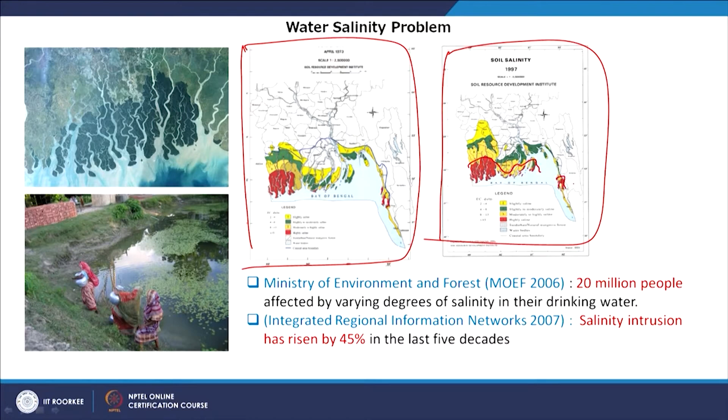As I said, during the late 1970s or in the beginning of 1980s, the Bangladesh government, supported by the United Nations Children's Fund, UNICEF, initiated a mass project installing shallow tube wells, STWs in short, to provide safe drinking water to the rural population suffering from waterborne diseases such as diarrhea and cholera, due to contamination of drinking surface water.

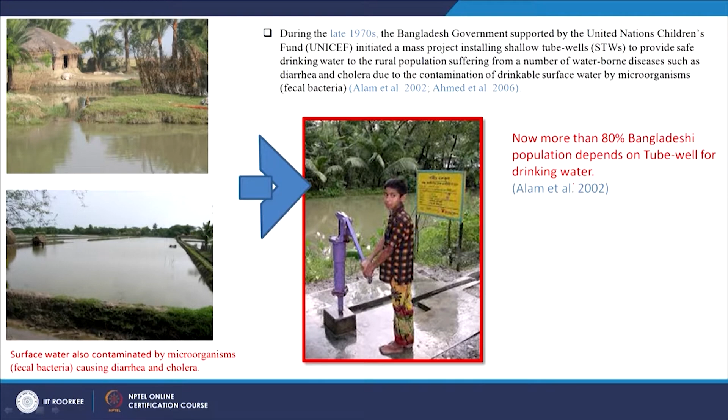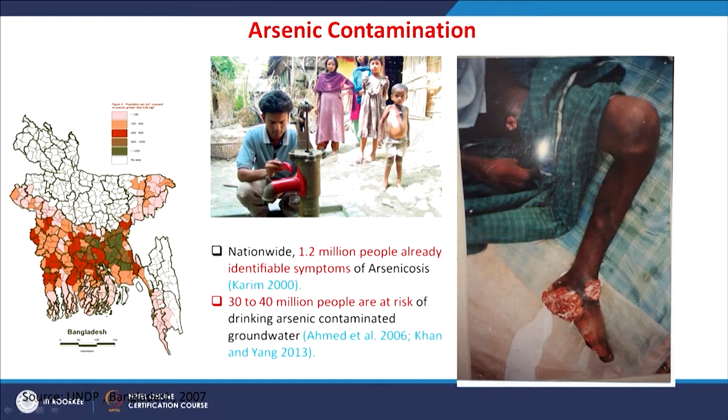Now more than 80% of the Bangladeshi population depends on tube wells for drinking water. Now they are affected by water arsenic contamination. 1.2 million people of Bangladesh already show recognized identifiable symptoms of arsenic, and 30 to 40 million people are at risk, directly or indirectly, because they are drinking arsenic contaminated water. It's not a small number, 30 to 40 million population.

Then what is the solution for this? You can see water, but you cannot drink water. There is a lot of water. They don't have water scarcity as such, because it's a coastal area. You can see water every day, but you cannot drink water, neither surface water nor groundwater.

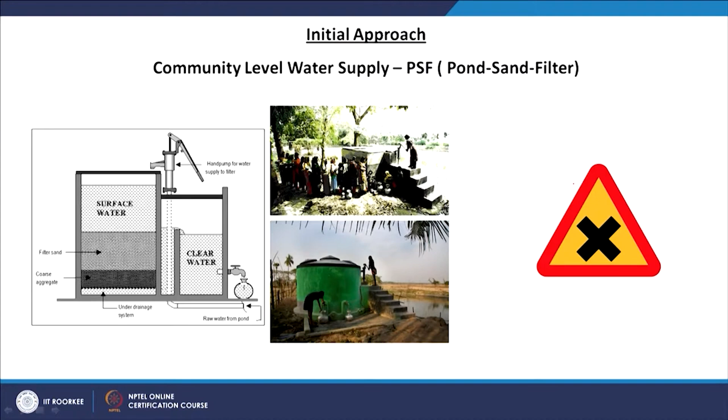What is the situation? Some people came up with the idea of community level water supply, the pond sand filter system. So you collect the pond water, and then with some kind of sand filter system, it's aggregated and comes out as clear water. But there are a lot of maintenance issues, and it's called PSF, pond sand filter. People are finding that this is not really working at all to provide drinking water.

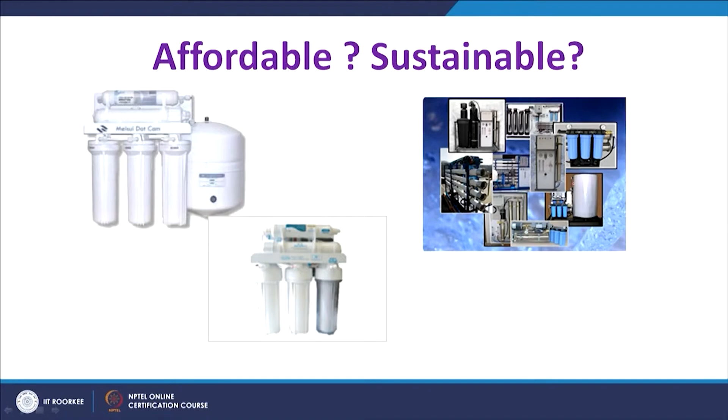There is another solution, providing water filters to the people, which would work to some extent, not badly, to provide better water. Though scientists are not very sure that it can really reduce or eliminate arsenic, still it is not very bad.

But are they affordable? The people in coastal Bangladesh are one of the most poverty-stricken people. They are really, really poor. A large number of the population are very poor. Can they afford to have these filters? This is a question, the big question, right?

So people are saying now that we need alternative drinking water in this area. But scientists find that people are not very encouraged, not very motivated to have these alternative drinking water sources. So people say there are several reasons.

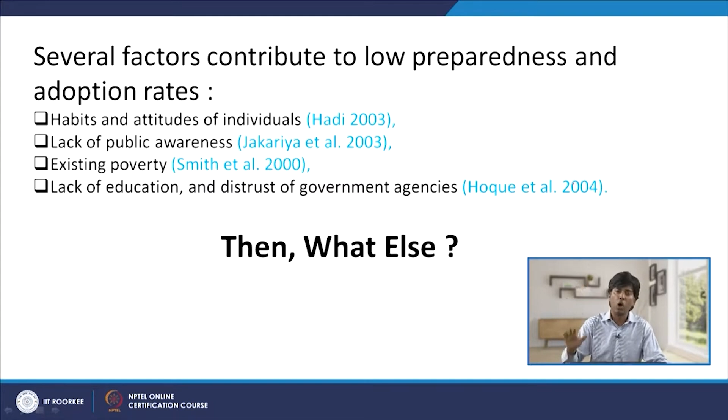People have a habit and attitude kind of problem. They became used to what they are drinking. They would say, no, my father, my forefathers, my grandfathers, they all lived here. They are drinking the same water. They didn't have any problem. They lived 70, 80 years without much issue. Why should I bother? I am used to it, I've become resilient, so don't worry about me.

Well, this is one perspective. Another perspective along similar lines is that people have a lack of awareness. Maybe they don't know, they're used to it, and they don't realize the seriousness, severity, and vulnerability of this disaster.

Another factor is existing poverty. People are really poor, they have so many problems in life, their entire livelihood is at risk. All households are at risk from the poverty perspective, income perspective, economic perspective. When they are in crisis every day because of their financial condition, it's really tough for them to look into other matters. It's a kind of background risk.

Also, there are other factors people identified: lack of education, and distrust in government agencies and NGOs. They cannot believe that these NGOs and governmental organizations are really honest in promoting any kind of alternative drinking water technology, because in the 1980s they were told that their surface water, their ponds, are contaminated, please use tube wells.

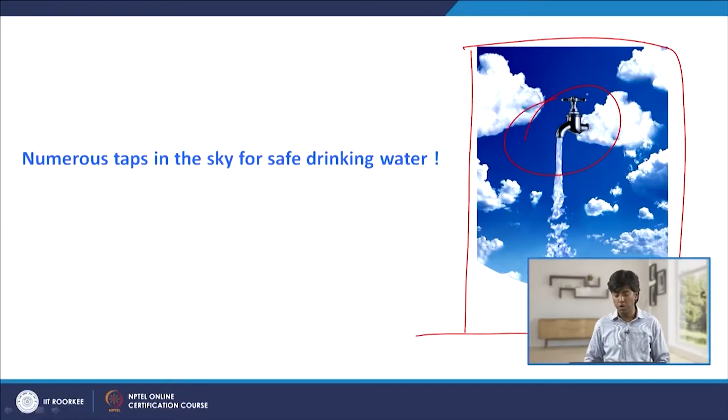Some people came, accepting that challenge, with a very innovative and simple idea. They said, hey, come on, we have plenty of water actually. There are numerous taps in the sky for safe drinking water. The sky will provide us drinking water, don't worry. Like this tap, you get gallons and gallons of water. Who says we don't have water? There is a Japanese non-profit organization, People for Rainwater.

They said, okay, this is called amamizu. In Japanese, it's a kind of rainwater that will bring a smile to every home. Therefore, diffusion of innovation is inevitable.

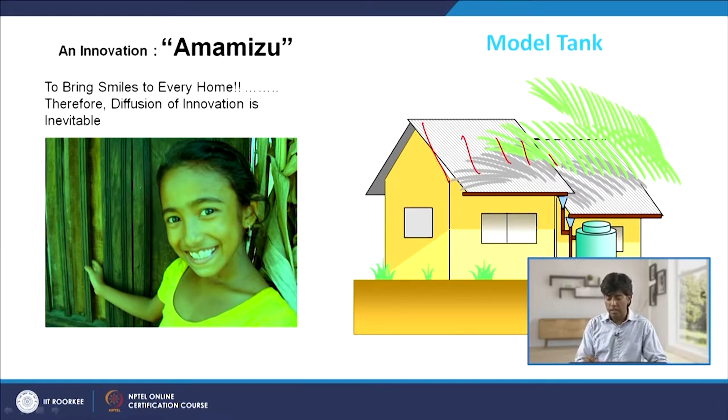This is a model tank at the household level. During the rainy season, you collect water from the roof, it gets channelized, and you store it here. Simple, very simple. There is a small net, pipes, and faucets. This is the small, simple technology you need.

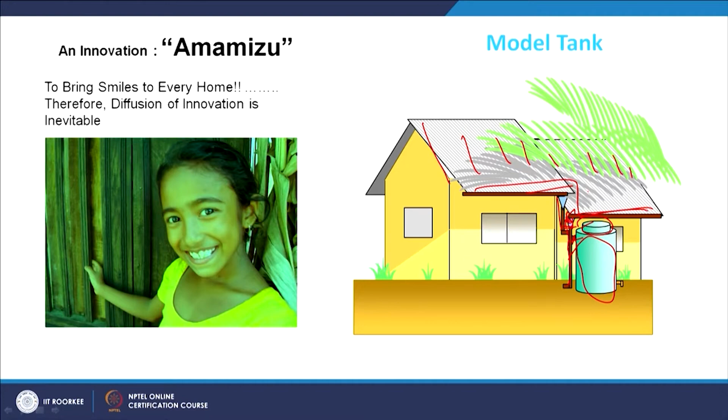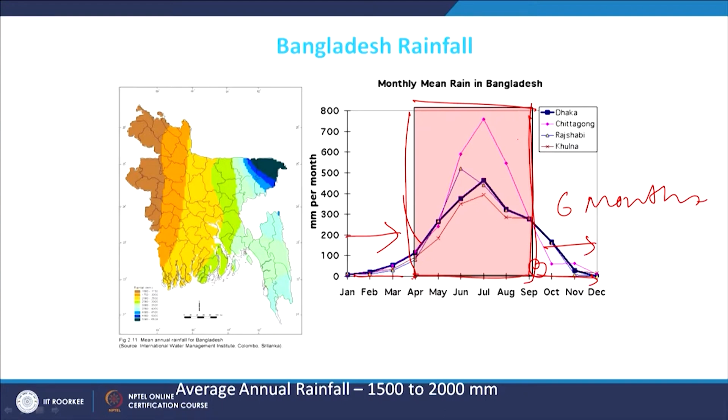Bangladesh has very good rainfall. From April to May you get rainwater, continuing till September. So from October to March, for 6 months, you need stored water. You preserve water during the rainy period and continue using it for these 6 months, so you don't need to worry. They have an average rainfall of 1,500 to 2,000 millimeters, but concentrated only in these months.

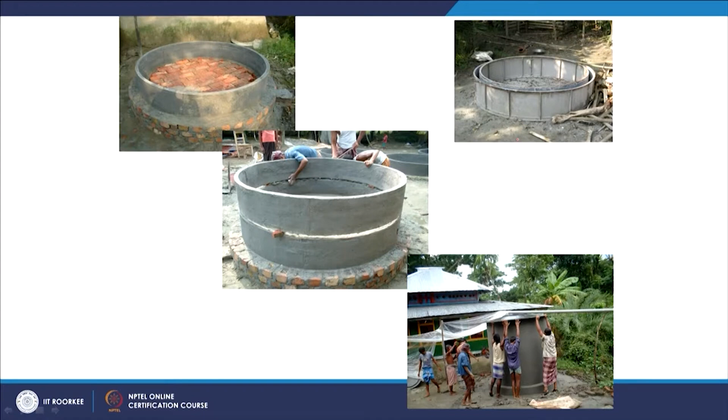Some people came up with the idea that if we have around a 5,000 liter water tank, then a family of 4 or 5 members can easily run 6 months with this preserved water for drinking purposes. So this is a small tank at the household level.

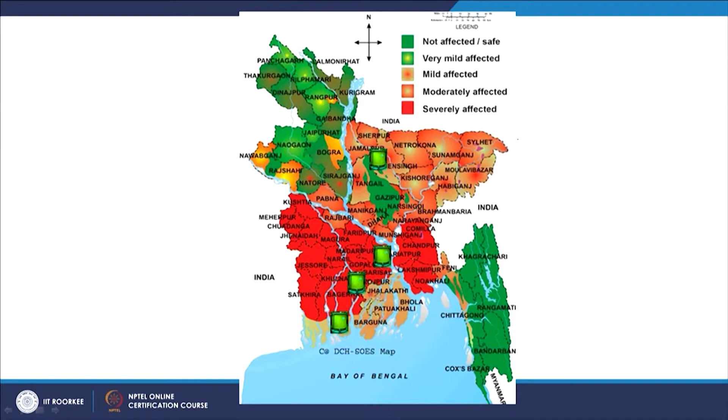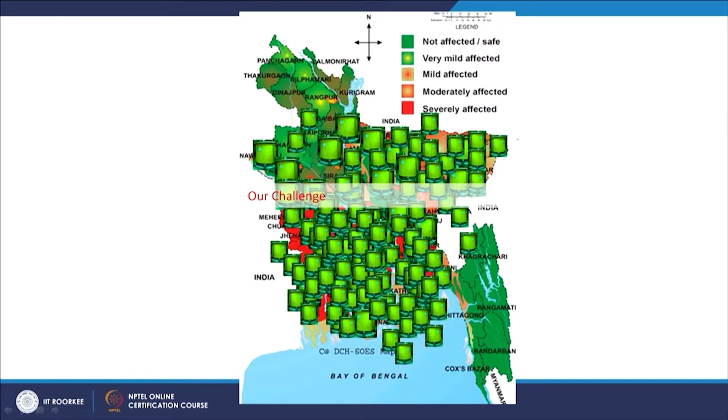So this is our challenge: how can we recover from this? How can we promote this rainwater harvesting? Given that, how can we solve this problem? As planners and practitioners, we are saying you need to promote this tank to reduce drinking water risk in Bangladesh. Tell us, what is the solution?

People are poverty-stricken, people have habit problems, people have problems of risk ignorance, so they don't consider so many problems. One is the socioeconomic problem, another is the educational problem. During such complex situations, the government is hiring you and asking what solution you can give.

So in order to encourage people, you first need to know why, what they need. What is the role of information? What kind of information should we provide to them, and how should we provide it, so that they would be motivated and encouraged to install these tanks?

So this is the ideal: a small effort. We don't need a very gigantic big effort, just a very small one. This small effort can have a very gigantic impact. Diffusion of innovation, this innovative technology, is inevitable for sustainable climate change adaptation and disaster risk management. So putting a lot of small power together adds up to big power, ending at a very gigantic big power.

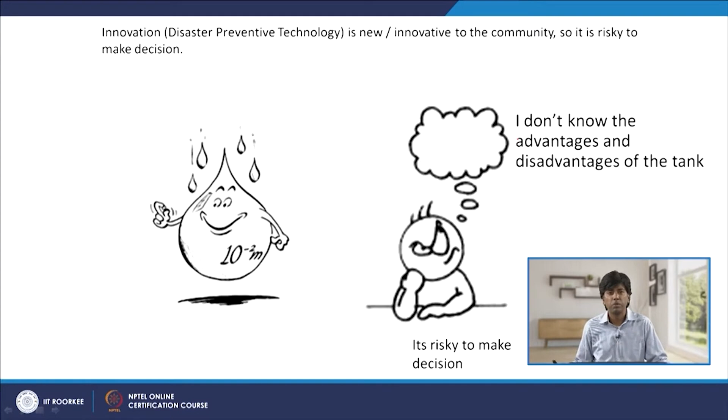Oh, I am really confused. Why? It's not easy to make a decision. Why? Because I really don't know the advantages, merits and demerits. How should I believe you? How should I trust you? Right? So I need information, because this is new.

No one before tried this one. This is an innovative technology. So innovation is also very dangerous in some sense, because this is new. And as it is new, its advantages and disadvantages are not known to the people. So people have no idea. They have to make a decision of adoption, decision of installation, in an uncertain situation, right?

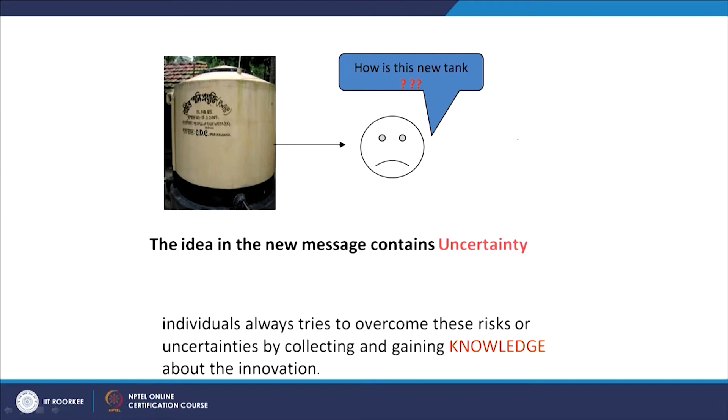If you are buying this one and it already exists in a community, no problem. You can buy this. But if this one is not available, never came before, how would people make a decision? That's a big question. So what kind of information do people then need? How would they know that, okay, this is good or bad? This will work for me or not?

They need information, right? They don't have the information because this is new, but if we provide them information, they would eventually know. They would judge and evaluate this innovative technology. This will remain innovative, but it would not be that new, because they would have some feedback.

So now people need to collect information in order to reduce their uncertainty. No one likes uncertainty. Everyone wants to predict their future. Any kind of risk is always in the future. We always face risk in the future. Risk cannot be in the present or past. It's always in the future, like fear, like uncertainty. So it is always in the future.

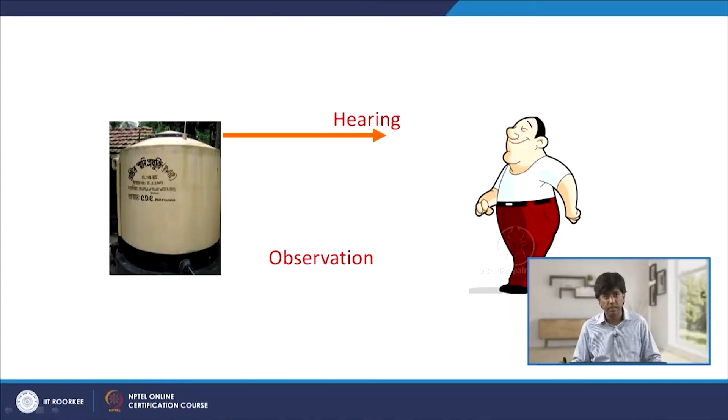No one likes an uncertain situation. They want to minimize the uncertainty. So then people would like to collect information. How can this person collect information about this tank? One is through hearing, right? He can collect it from listening or hearing from others.

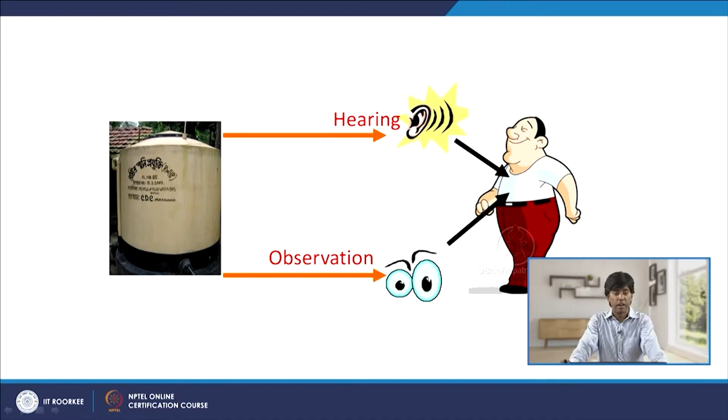Another one is observation, watching this tank somewhere, at a friend's place, a bazaar, market, an anonymous person's house. So hearing would give him software kind of knowledge, like what is the function of this tank, how does it work, what are the utilities, effectiveness. From his friends, his relatives, neighbors, someone he doesn't know, or from radio, television, anything. It could be human networks, social networks, mass media.

So he or she can collect information about the tank through hearing, but hearing only allows you to collect information about the software part, not the hardware part. For the hardware part, you need to watch it. What is the shape, size, structure? Is it beautiful or not? Is it big or small? Okay? Is it round or square?

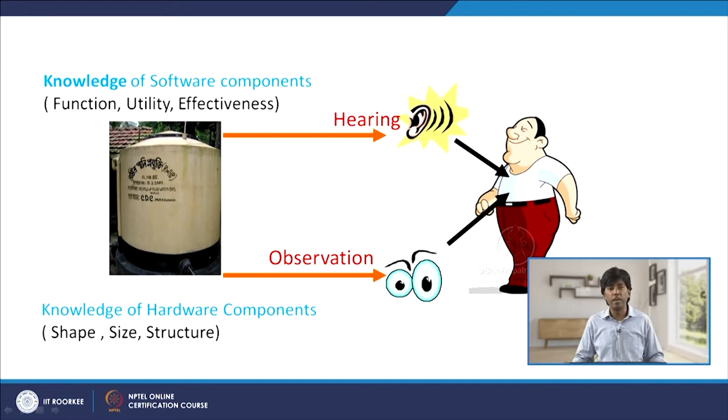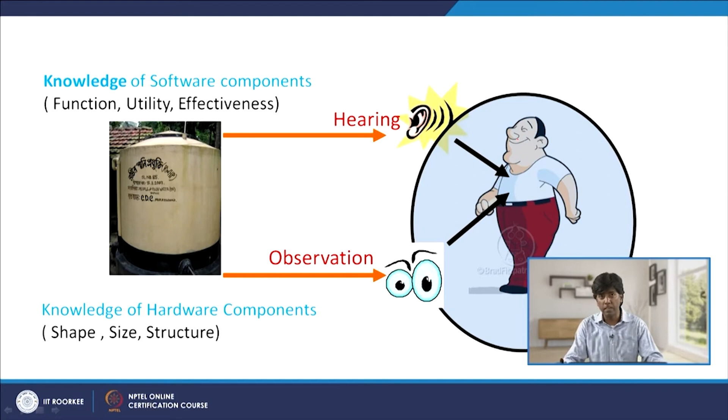These are also very necessary, because maybe I don't have space to install it, or maybe it would look ugly if I put it in my house. So these hardware components you can only get through observation. Okay? And then it would complete my knowledge. This is a model of diffusion of innovations developed by Rogers.

They are saying that knowledge is important to make decisions, and knowledge means information, which we can get through hearing and observation. But knowledge does not immediately lead to adoption. No. It takes time. Before making adoption decisions, we need the persuasion stage and decision stage, that means what is the utility of that?

From a subjective point of view, I need more information. Subjective interpretations, whether in my condition it will work or not, this kind of context we get from what we call discussions. So we need three kinds of information: hearing, observation, and discussion. Okay? These three kinds of information would really help me reduce uncertainty in decision making. And then I would make a decision.

In my two other lectures after this, I will give you the examples from Bangladesh, the results, the feedback, how people collect this information, what kind of networks they use, and who plays a bigger role.